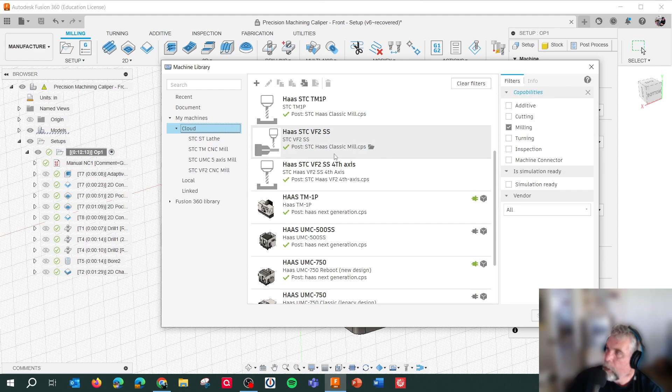These are previous older ones I have, and see, these have no attachment to a simulated machine. These used to be available. I just renamed them for now. But I figured out how to get them, because anything with a box at the end is a simulation machine. If you go through the whole list, they're pretty much all simulation machines now, except for a couple.

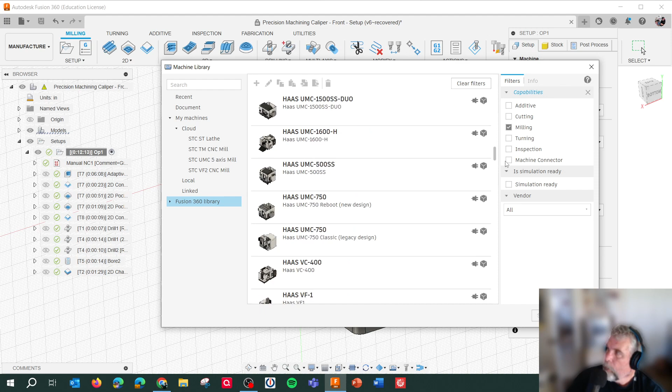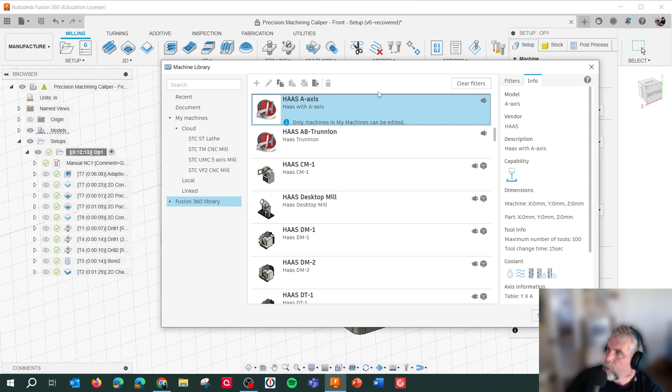This Haas A-axis is one. Actually, that one might work, or the ones without the boxes. So I did one with a generic Autodesk one, but I could just do this one. I'm going to hit copy and put my local one.

I'm going to paste right here. Do I want the machine connector? I'm going to say no. Even though it still gives you it, I'm going to hit edit. It's not connected to a machine.

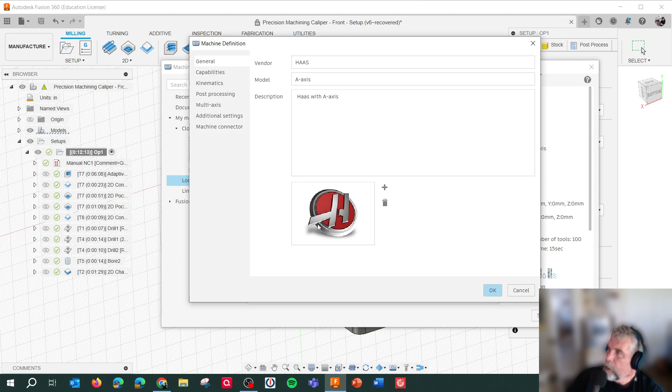So up here, we're going to rename this the STC Haas TM1P machine, right? Get rid of that. Capabilities, supports tool preload, no. Number of tools, it only has 10.

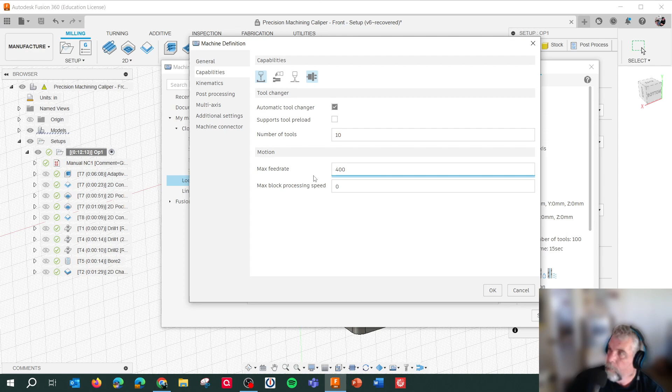Maximum feed rate is 400. Kinematics, we got Z, and rapid feed rate of 400. I'm going to put the maximum feed rate as 300. Head, this is where you want to have it. I'm going to have like 10 RPM minimum, and the maximum is 6,000. I'm just going to put 1 there. Maximum tool length, I'll put like 6 as max, and tool diameter is 3 inches for the face mill.

Y-axis, do the same thing, 400 and 300. X-axis, same thing, 400 and 300. A-axis, we don't have one, so delete that one. Table, nothing else there. Post-processing.

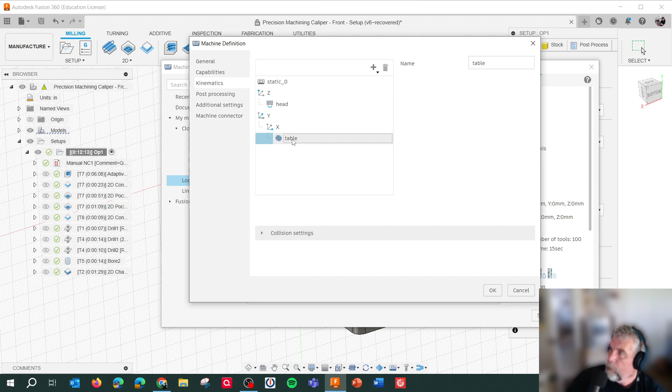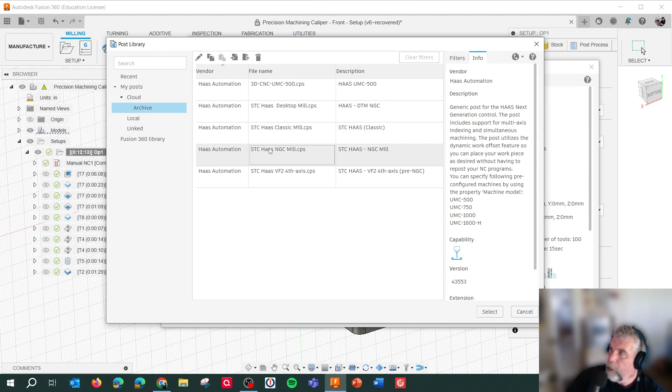Which post are we using? I'm going to click on this and say no, we're not using the pre-NGC one. I can go in the library, or into my cloud or my archive right here. I'm going to pick the NGC one. I have it labeled. Hit select.

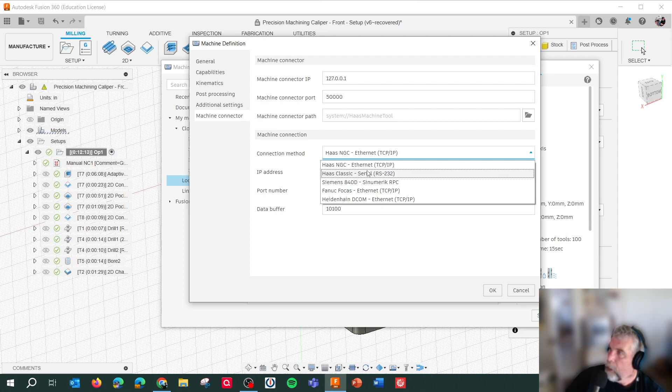Where am I going to dump my files? I'm going to put them on the desktop. Additional settings, tool change at time, 15 — I'm going to call that 12 seconds. Machine connector, I'm not really using, but I got Haas Classic Serial, so I'm not using that. Okay, hit OK. Now I'm going to hit select, and that's going to be my new machine.

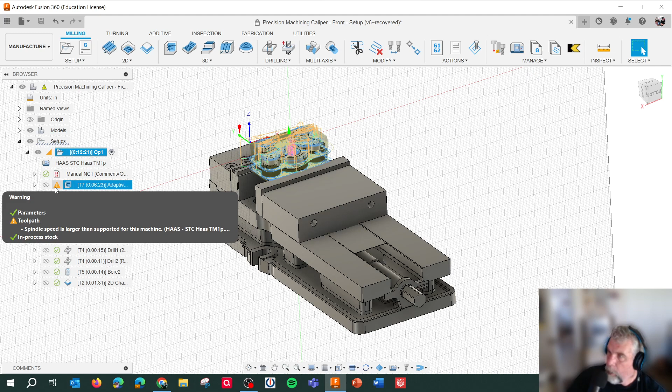Right off the bat, it's got a warning here. I'm going to hit OK. The warning says spindle speed is larger than supported for this machine. Ooh, what is it? It's 8,100. I can't use that. I've got to go down to 6,000 maximum.

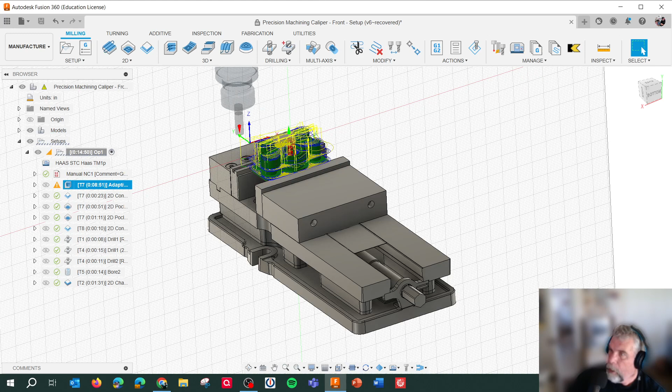Whoops, back it up a little bit. Make sure my feed per tooth, because it seems to want to adjust that. We're at 6 minutes 23, and it recalculates now. It's 8 minutes 51. That's fine. I think I need to regenerate that, and hopefully the warning goes away. I know adaptive takes a little calculation time. There it is, gone away.

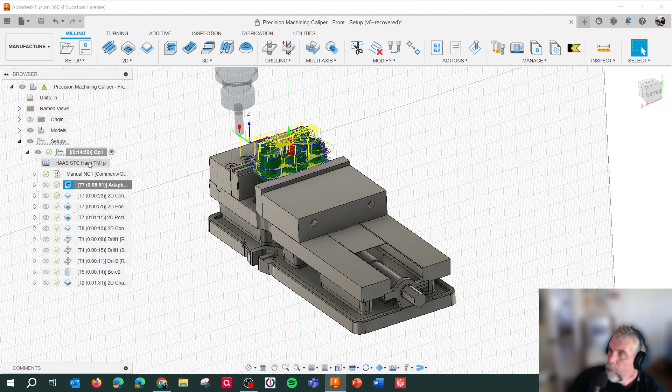So I got the operation times turned on. I know it's down here, but I can see each individual operation. This is 8 minutes 51.

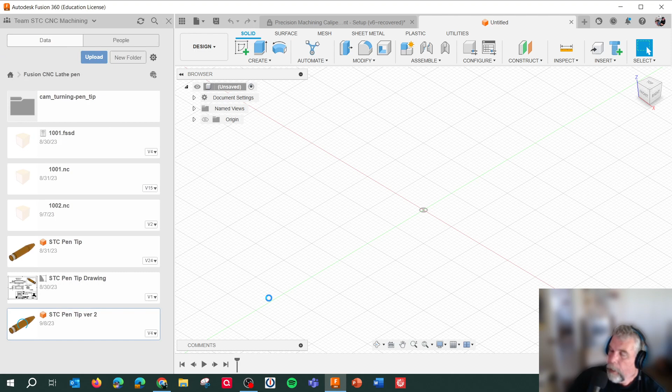Okay, let's say I was doing lathe work. I'm going to do another example of why machine selection is good. I'm going to pick the Fusion pen — we were doing pens, and that was a lathe project, right? And I was posting, and I actually was — see right there, post was lathe, because I picked a machine.

So let's just leave it at that, hit post. This one updates. I go get my G code. I can see that's correct.

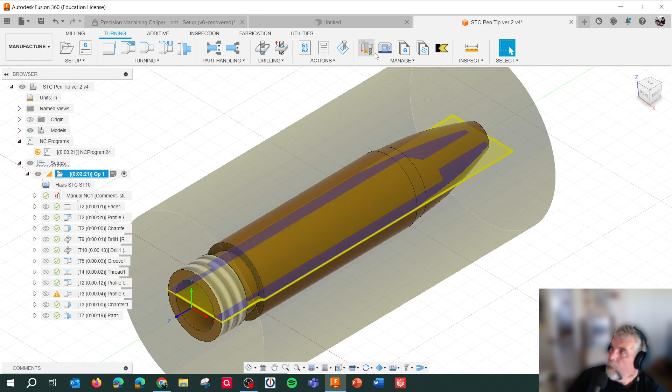I go back to this one, and let's say we did not have the machine selected, right? Okay, go back to this one. G code time. I gotta make sure I save that. File, save. Okay, keeps on saving the machine.

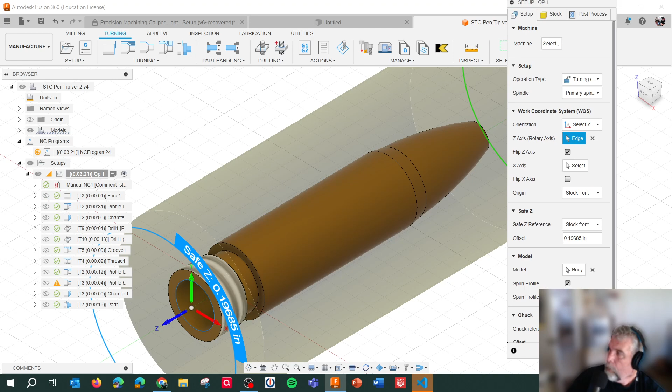Edit. I'm trying to create a problem here, so I'll show you why it's beneficial, because right now we've only got the post up there, no machine. All right, I go back to this machine. I go to the post, and it's still on turning.

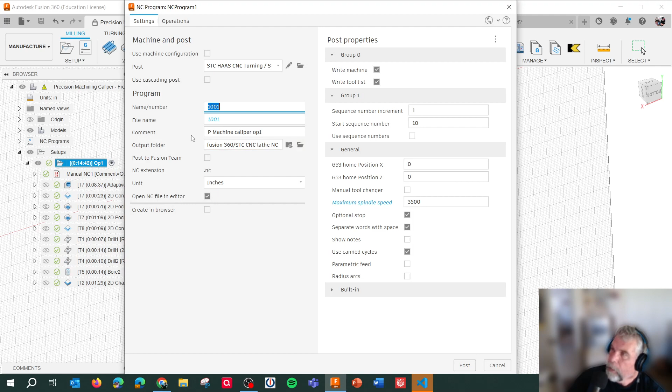So if I had the machine config done — because I might post the code and do this, and then all of a sudden I get a warning. It says failed to post, and if I look and go, what's going on? It's because I didn't have the correct post.

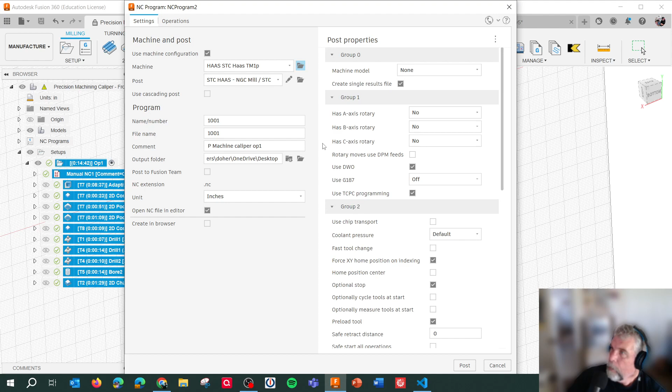So if I had selected the machine originally, this one here, it's already aligned to the correct post. So that's a second advantage of machine selection.

But that's without simulation. So this is like better flow through, as far as having the correct post and identifying that these RPMs are correct. And I've actually had to pick up that one of the tool diameters was incorrect, because we had a machine that could not take a 3-inch face mill, and we had it in there, and it said no, your tool diameter is too big. So you can use a lot of this stuff to your advantage, okay?